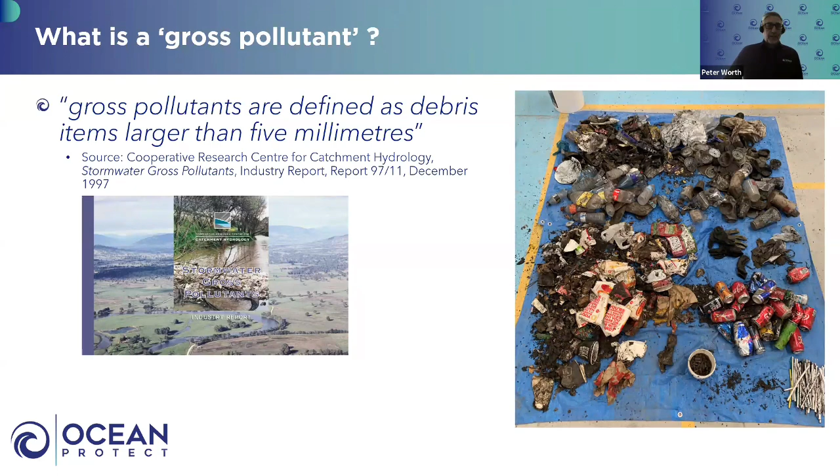All right, thanks, Pete. Now, the 97 CRC report, which is pictured there, first introduced the first proprietary GPT. It was actually invented by 2 retired Australian engineers down in Victoria in 1992. It was also the first GPT that was really tested by a university at all. It contained a separation chamber, shown there.

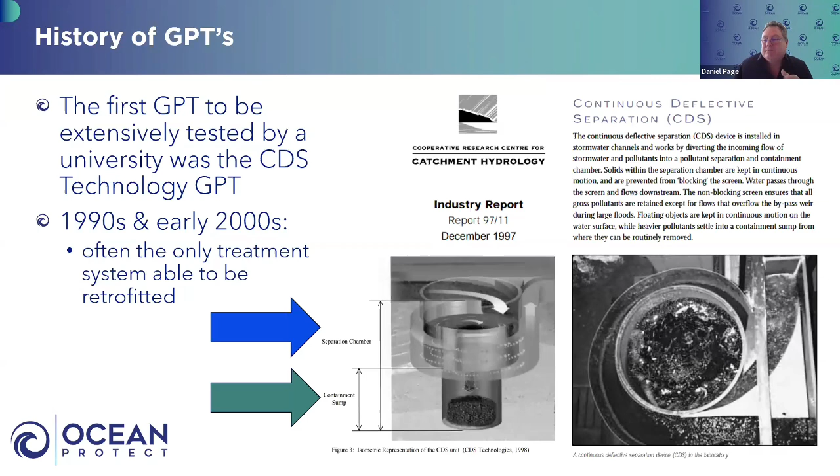It also contained a separate sump, shown there, and it incorporated an indirect screening technology that was commercially available from about 1994. They were easily retrofitted into existing drainage networks. Many of the coastal councils around Australia installed a lot of these throughout the 1990s and the early 2000s. It was part of the Stormwater Trust grant process around then, and also led to the preliminary development of council-based stormwater management plans and reports that we can sometimes see today.

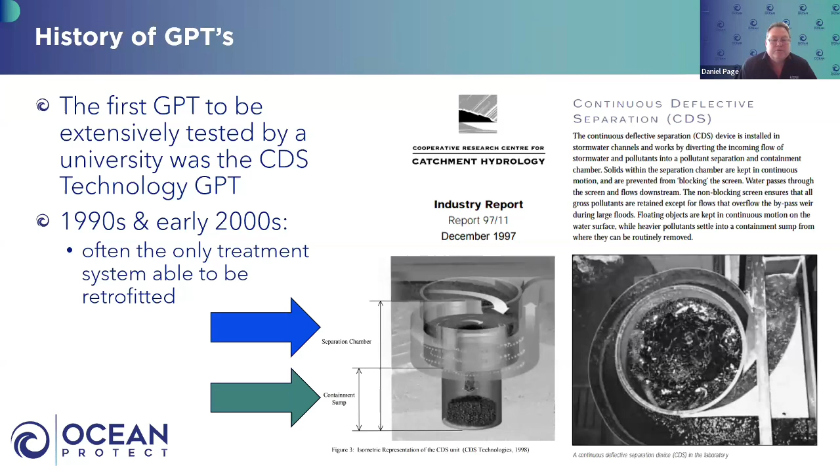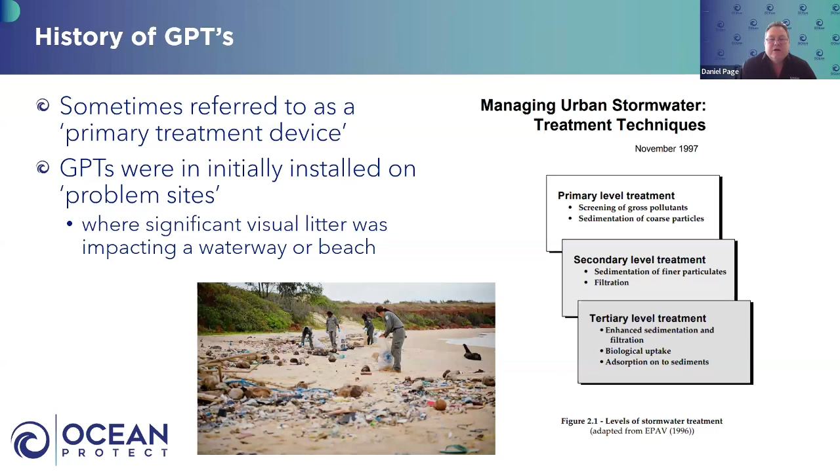They are also sometimes referred to as a primary treatment device. This came about because of the 3 different categories, primary, secondary, and tertiary, that was introduced and used by New South Wales EPA, Victorian EPA in 1997, 1996, and so on. Today, a lot of products actually span across multiple categories, so therefore they're not that useful, but GPTs can still be referred to as a primary treatment device.

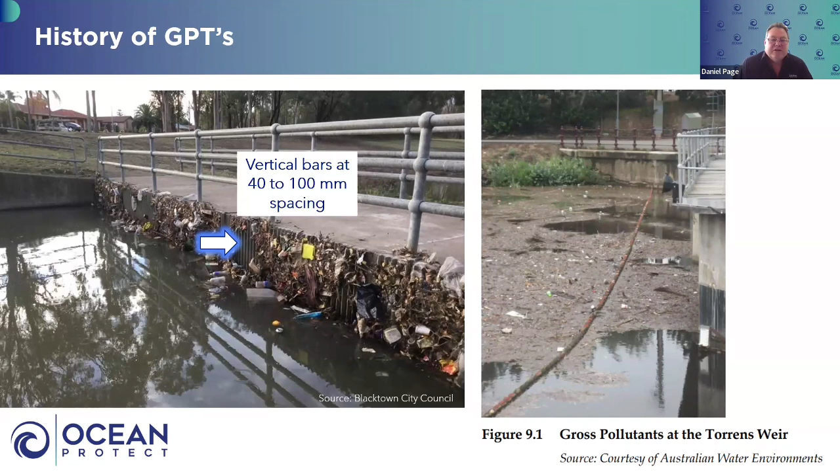Later on, we're looking at the 2010 definitions. You had that most GPTs were defined as being really good at capturing gross pollutants. In fact, there's hundreds of reports, industry reports, and product reviews that are available on different products, all confirm the effectiveness of GPTs to capture gross pollutants to some degree. As seen in the pictures here, you can get a lot of different gross pollutants that meet the 5 millimeters in 2 dimensions categorization. Some of these reports also highlighted that GPTs can remove associated pollutants.

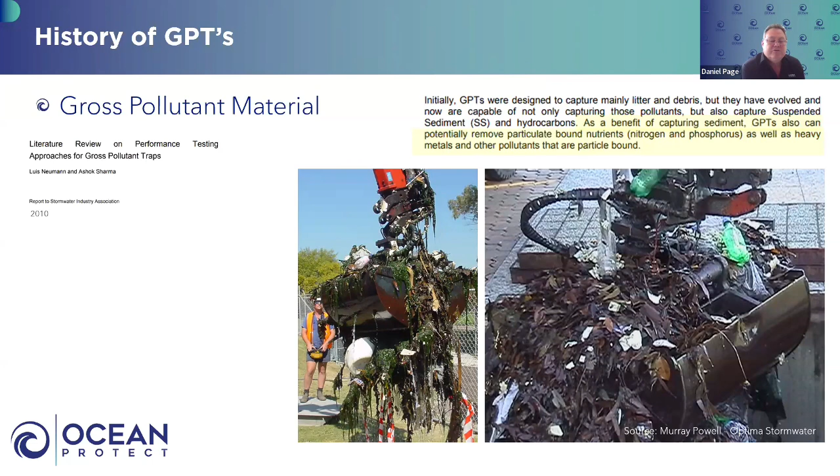Now, associated pollutants are essentially pollutants that you remove when you actually capture another pollutant. So the GPT report in particular mentions that, and there's a caption just there. And in particular, if I focus on the highlighted section there, you can see that they also make reference to particulate bound associated pollutants. But like many of the other reports that are available on the market, they don't quantify necessarily how much of each pollutant the GPT can actually remove. And therefore, to better understand the overall performance of a GPT, you need to really know the different types of GPTs that are available on the market. And I'll hand back to Pete for that.

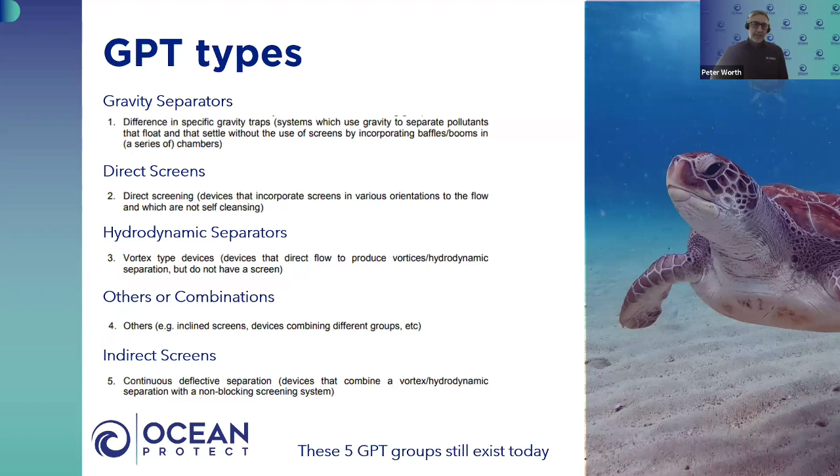All right, we'll go through the 5 main types of GPTs that we see or have seen historically. Gravity separators, direct screens, hydrodynamic separators, others or combination style units that use 1 or 2 of the other categories, and indirect screening GPTs. Thanks, Dan. It's a picture of the 5 main types and some images of some different GPTs that fit into those categories.

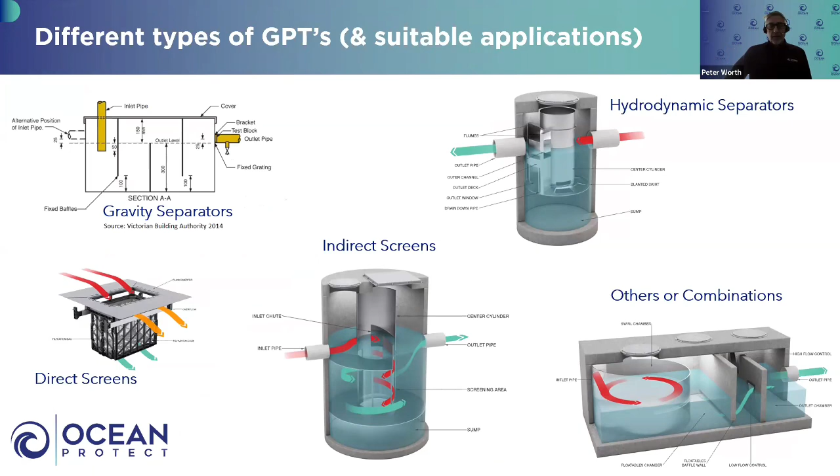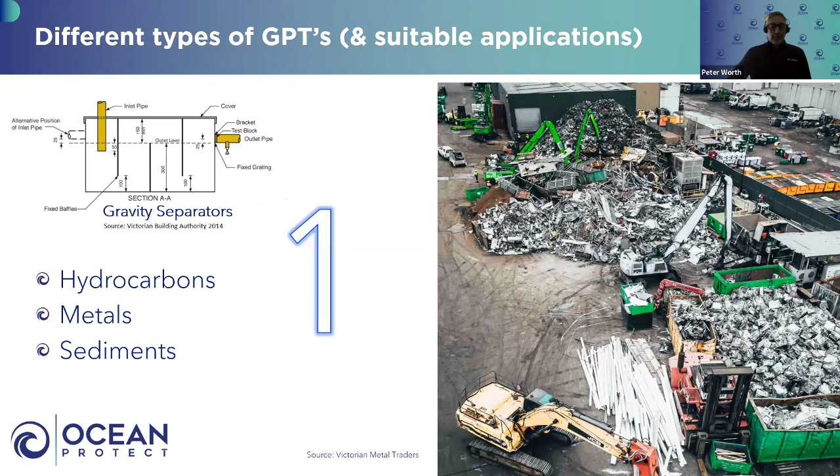Type 1 are your gravity separators, typically using baffles. Internal baffles that elongate the flow path through the system and promote gravity, dropping the sediment and pollutants to the base of the system. They typically target hydrocarbons, metals, and sediments, and it's really important to consider what your target pollutants are for your particular project or site when you're picking which type of GPT you may want to use.

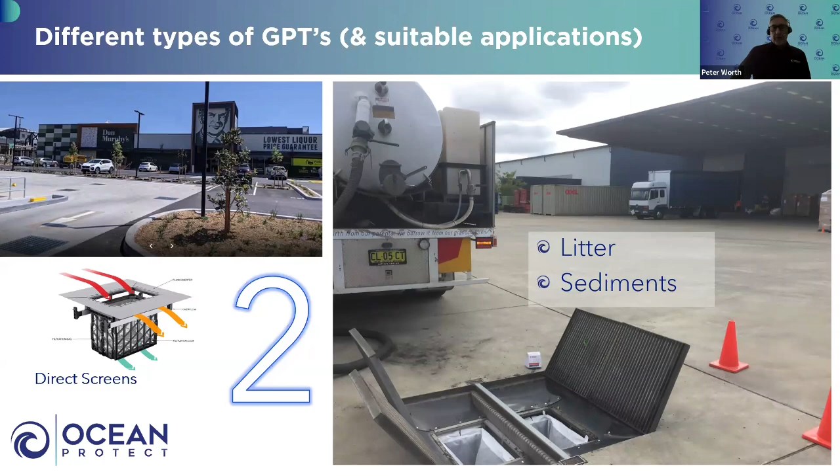Second type is a direct screening style GPT, such as the vertical trash racks that Dan touched on earlier. And we also have the pit insert style GPTs, in our case, our Ocean Guard. As pictured here, they capture debris coming in through a grate via surface runoff. Next type is your hydrodynamic separators, basically creating a vortex inside the system to promote sediment to drop to the base into the sump. And they're often used for car parks and industrial sites where litter may not be a key pollutant, because they really target more of your hydrocarbons and your sediments.

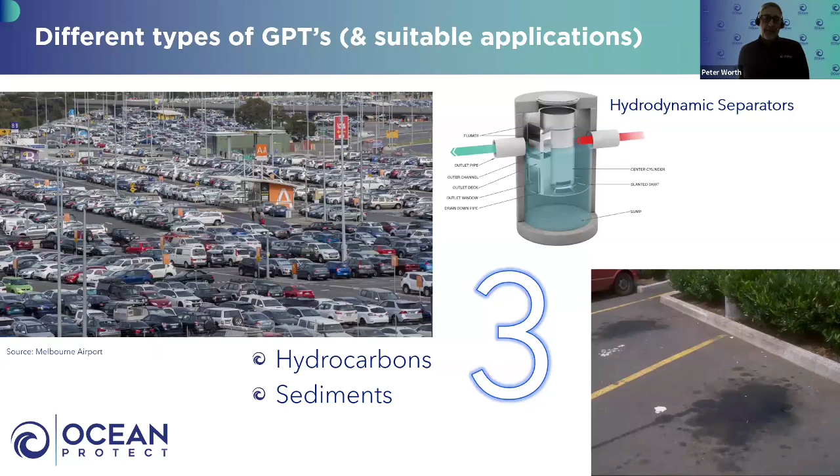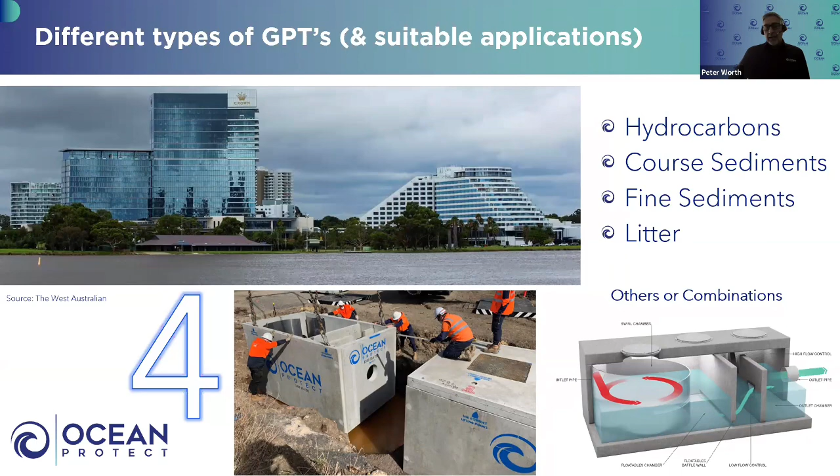Next type is the combination style units. Basically, they can target hydrocarbons, coarse sediments, fine sediments, and some litter. Combination units use a combination, hence the name, of some of the other types of GPTs that we've just spoken about. Often hydrodynamic and baffles are used in conjunction, as you can see the image on the bottom right of the screen at the moment. Or you can also have indirect screening and hydrodynamic functions in the one GPT. The image at the bottom right is a Vortechs unit. Sorry, just go back down, thanks. Which combines hydrodynamic separation and baffle walls. And it can be quite handy when you have sites with shallow depth to inverts.

Last type is indirect screening GPTs. They've been around for a while now. They're probably the most popular GPTs, and in my opinion, deliver the better outcome. They target a wide range of pollutants, including litter, debris, sediments, and hydrocarbons. They use a continuous deflective screen, which is non-blinding, therefore more robust in delivering a better outcome.

The OceanSave unit, which is the graphic there in the middle of the screen, is a continuous deflective screening GPT, which is also non-blinding. Yeah, and there's lots of these GPTs historically been installed around the world. They're very widely used.

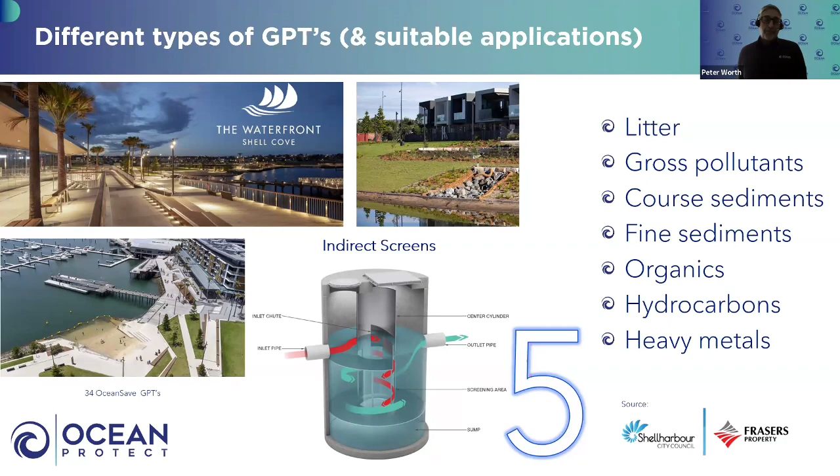Thank you, Pete. Thanks, mate.

All right, now over to key design and management considerations that you may want to go through. So according to the Stormwater Industry paper of 2010, which I referenced earlier, there's 5 general categorizations or thoughts that need to be considered when designing or selecting a GPT. It's not just these 5, but these are the 5 that this paper grouped together, and it's a reasonable paper to go through and teach you guys today on what processes you should consider.

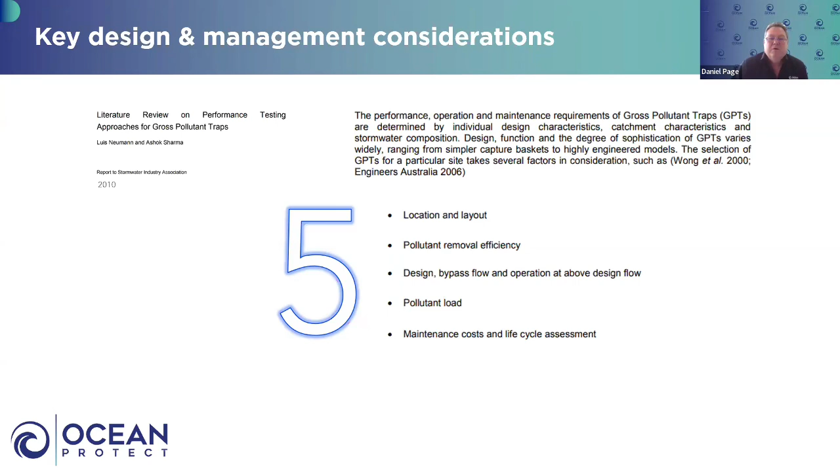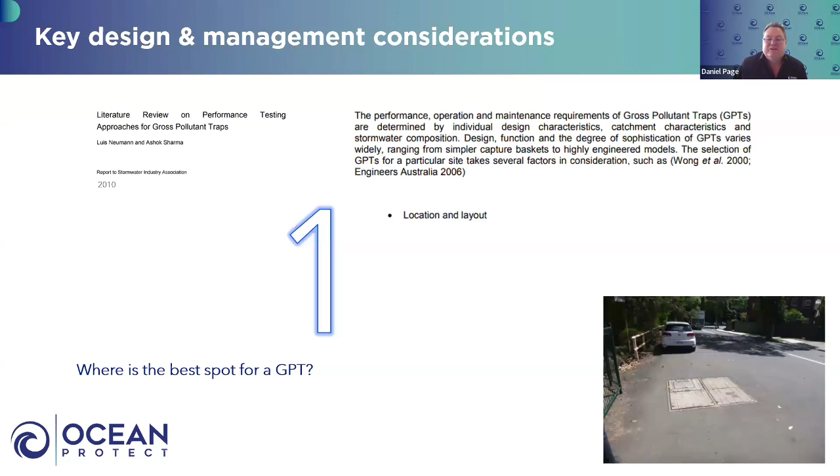But let's look at the first one. Just like buying a house, rule number 1 is always location, location, and location. So the best thing there is to work out where is the best spot for my GPT. So whether you're looking at a drawing or a council site or whatever, you need to look at that. You may want to consider putting them in the road, although you need to consider maintenance, access, and so on. Beside the road or the road verge might be a better option,

or perhaps in a footpath, an access way, a reserve, or a park that you can see in the background of one of those photos. Even a garden bed sometimes might get used. So long as you have the space for the construction to occur, and access to the manhole covers for future maintenance, this should be all right. You should also, though, consider any other services that might be around, electrical, gas, and so forth.

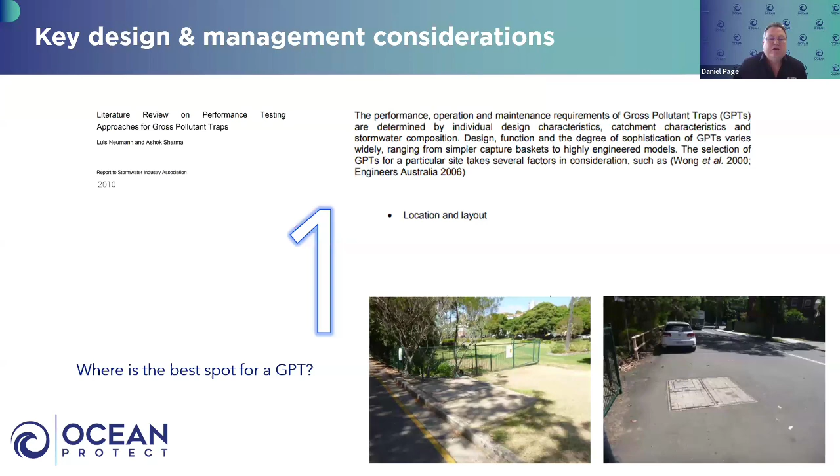And sometimes you may need to consider using multiple devices if one single device in one location at the end doesn't necessarily work. Okay, that's the first one, location. So as I said, it's the most critical one. It's the one you've got to start with.

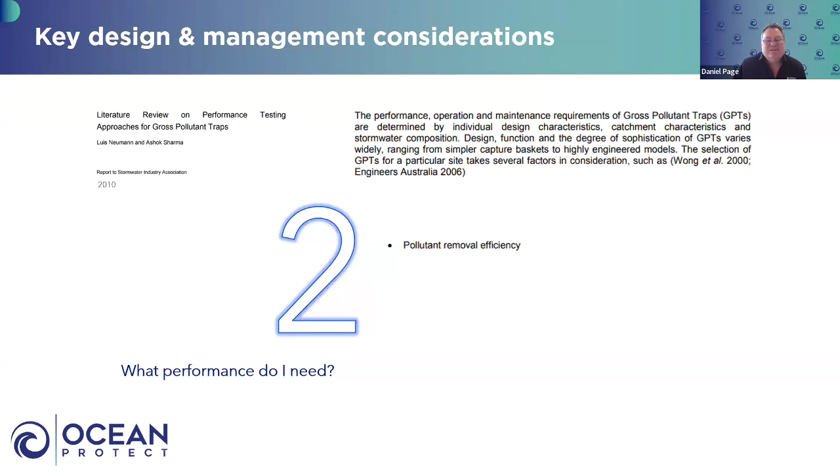Then you get into the second type, which is your removal efficiency. Now, you need to consider, well, what is it that I need to capture? How much of it do I need to capture? What targets do you need to capture? Below is an example of the Blacktown City Council targets taken from their Growth Centres Development Control Plan. The target for gross pollutants is listed as 90%, and they also stipulate a 6-month treatable flow rate for all GPTs.

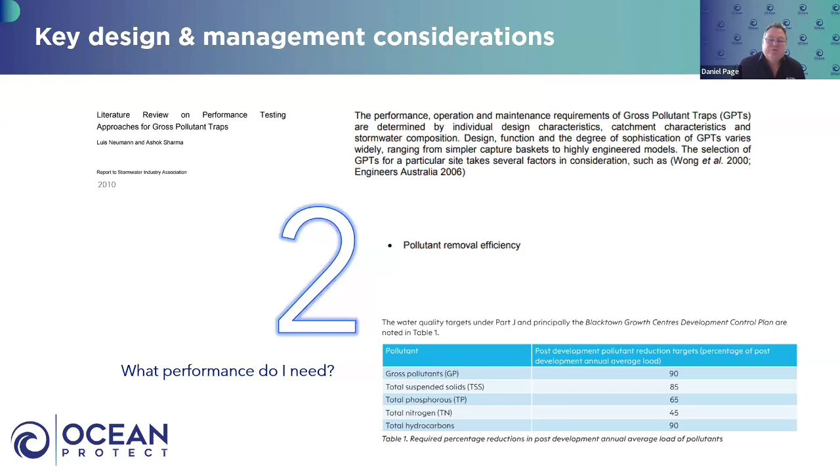Now, technically, Peter mentioned the indirect OceanSave GPT before. This GPT can easily achieve the 90% target just by treating a 2-month flow event. So it doesn't actually need to treat the 6-month flow event. And in actual fact, you could end up with an oversized GPT by having such a large treatable flow rate. But the upside of this, of course, is that you treat and capture more TSS and potentially more TP when you do so. So that's okay.

Step 3 or consideration 3 is also a very critical one. It's one that does require a little bit more engineering rather than just picking something out of a list. It includes the peak flow rate. It includes the treatable flow rate. And it also considers some of the other impacts, such as potential flood risk or downstream water and so forth.

Now, the peak flow is a hydraulic limitation of the GPT. It is defined by the type of GPT, the model size of the GPT, and in some circumstances, the configuration of that GPT. I would recommend that you talk to the suppliers or look at their technical information and review these in order to get some information to help make your selection.

Oversizing a GPT model to achieve a higher peak flow rate is not always the best solution. I would actually suggest that if your peak flow is substantially higher than what the manufacturer's model would normally recommend, then you may need to go with a smaller GPT and position it offline and have an appropriately sized and designed diversion chamber instead.

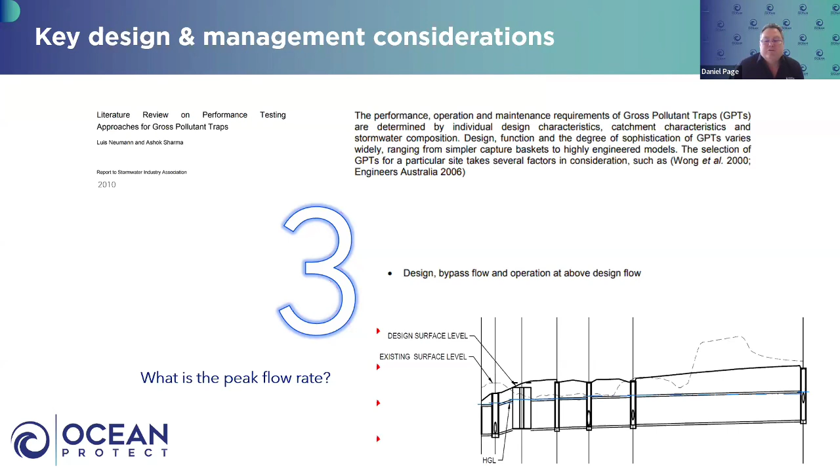The supplier should be able to help you out with this, or at least point you in the right direction. All right, the treatable flow rate is the next iteration on this part 3, and it's defined really by the type of GPT that you select. Each GPT may have a different treatable flow rate or requirement for treatable flow rate, and in part, some of the other 4 design considerations may need to be considered when you're looking at treatable flow rates.

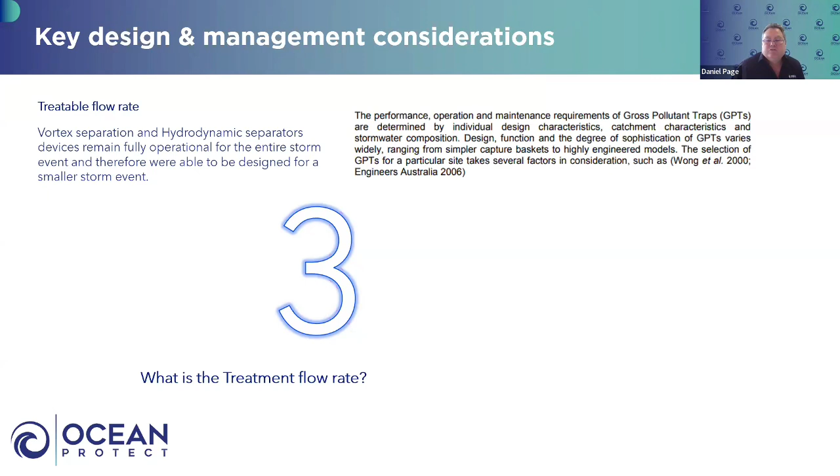For example, different GPT types may need to treat different flow rates just to achieve the same result as far as performance goes. Now, if I look just at the OceanSave and the CDS technology GPTs, the pic on the left shows the indirect screening flow, or the CDS technology, which Peter talked about earlier. Now, this type of GPT can be designed to treat a much lower flow in the treatable flow rate and still achieve a high performance because of its non-blocking nature.

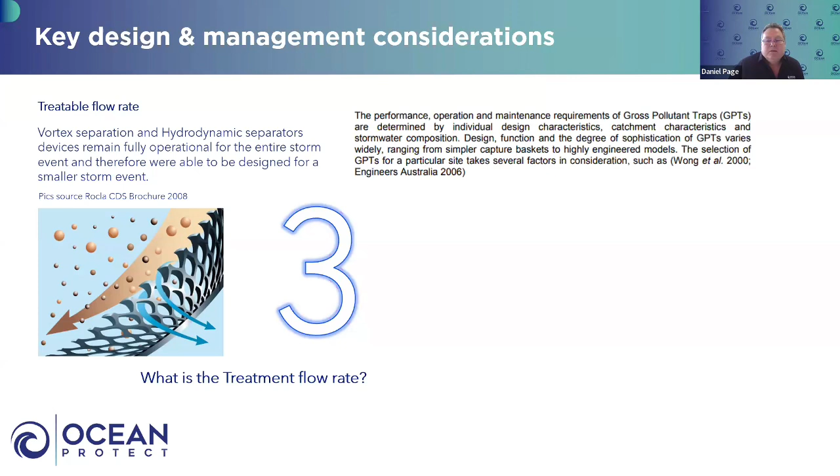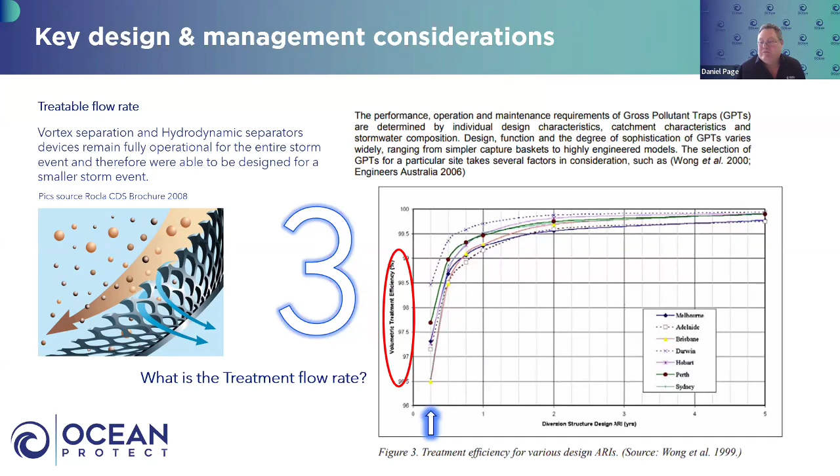Now, these graphs took the university a few months to produce, and they only did them for the 7 cities that are listed there. Today, of course, you can use MUSIC, and you can crunch a whole 10 years of data in a few minutes and work out exactly how much flow volume you actually have going through your GPT. And if anyone needs any help in doing that, then do let us know.

The last part of section 3, and this is quite detailed, sorry for the time taken, is the operation of the GPT. So it's very important, of course, to put a GPT in that actually does what it's supposed to do. It's very pointless specifying and installing a GPT that just does not function. That just doesn't make sense to you, I, or the environment. The biggest one, of course, is downstream hydraulic impacts, and these really should be considered.

The section example below there is the correct configuration of an OceanSave GPT upstream of a bio, for example, although the downstream water may just be a lake, anything else, even a detention basin. Now, if the bio has drowned inlets, which this one has, which means that the water comes up below and over onto the surface, or has an EDD that is higher than the invert level of the GPT, then this is not good. Or if the flow that comes down the GPT can't exit the bio, then obviously that leads to a backing up of water and reduction in the performance of the GPT during a rain event.

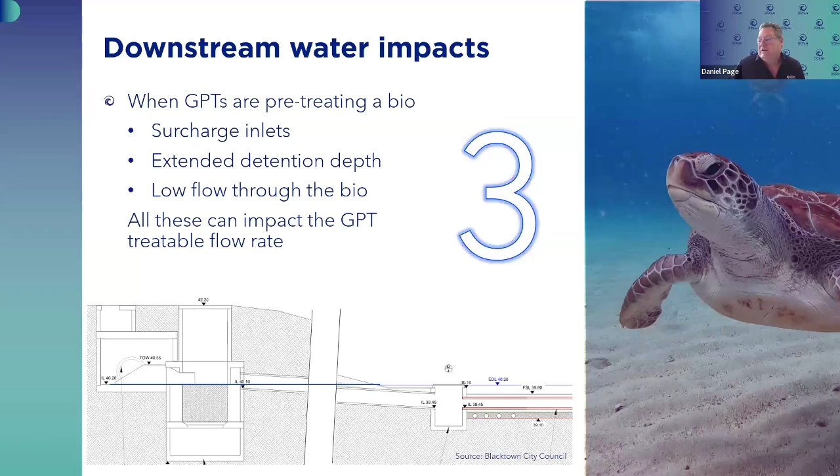So, for example, this GPT here would do about 500 litres a second, and the example I took it from, the bio, does about 22 litres a second. Therefore, you really need to make sure that you do have enough flow that can travel through the bio. Otherwise, your GPT is only working for a few minutes. It's probably the biggest hydraulic error that we see many consultants and also council engineers inadvertently detail on their plans. So I do implore you to seriously consider the actual site impacts and the backwater impacts.

It's not always the case just with bioretention systems or detention basins downstream. It can also be the case where you might have creeks, rivers, oceans, different things like that. So you need to be aware of the invert levels of your GPT and any top water levels or standing water considerations at your outlet. Right. Design considerations number 4 and 5 that were listed in the SIA report are similar, and you're looking at pollution load and maintenance of that.

They're more relevant to the council engineers that are in the audience, or to the other final GPT asset owners, if there's any of those in the audience. The size of the GPT pollution volume in the sump or the offline storage area needs to be large enough for 6 months and/or up to a year of pollution load. You don't want to have it much more than a year. You don't really want it much less than 6 months. Otherwise, you're cleaning it too often.

And most GPT manufacturers have storage volumes that fall into this area and are adequate for the model size that you've actually chosen. So if you size the GPT right, you generally size the pollution loading holding area correctly. Now, MUSIC can also be used to estimate the pollution load. All you do there is model up your catchment, look at the pollution loads in your results and so on. But also note that the MUSIC pollution loading is conservatively high. When you look at TSS, it's actually quite high. When you look at gross pollutants, it's actually quite high. So you can use that as a worst case scenario.

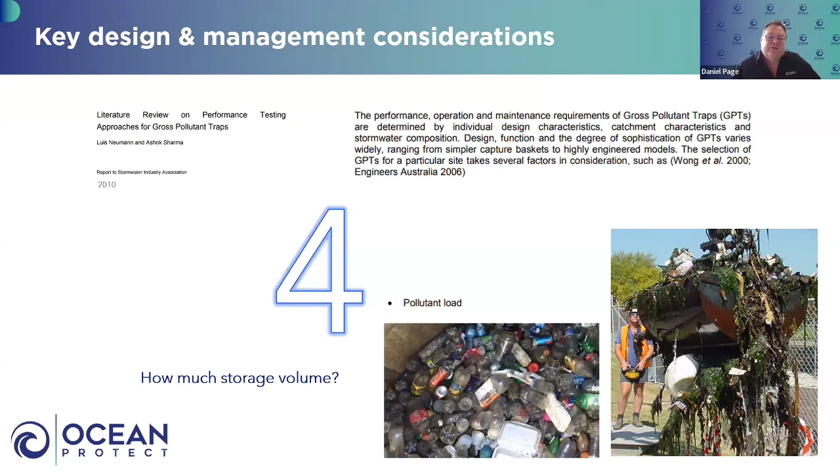Likewise for section 5, which is your design consideration of maintenance, and that subsequently forms into your life cycle costings. So this is again more important to your final asset owner, your Dineshes and Joshuas in the audience. The critical thing that the engineers should be considering, though, is just to ensure that all GPTs can be maintained. And if you want to see some examples of ones that have never been considered that way, I can show you some photos of ones that you can't actually get access to, which is a bit pointless.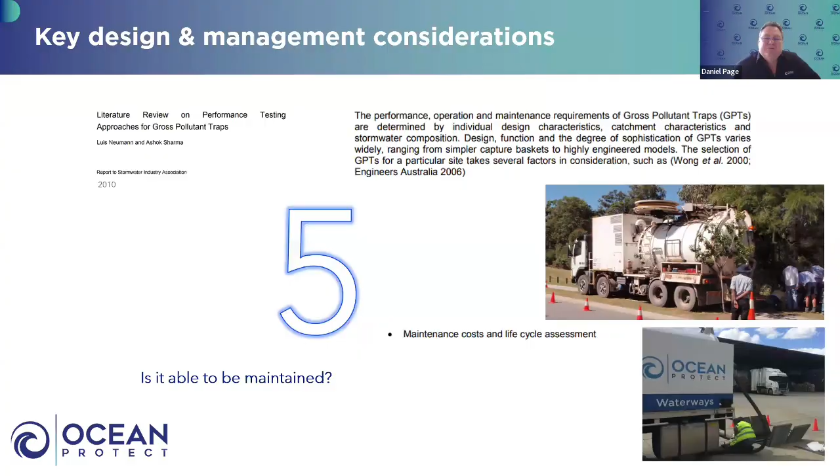It's also worth noting that GPT maintenance costs are generally similar for all the different types of GPTs, based on the volume that you're taking out and the access and so on. So the maintenance costs may not necessarily be relevant to you as the engineer, unless you're really comparing, say, the treatment using multiple small baskets directly with a single GPT at a downstream location instead. So, anyway, that pretty much concludes our presentation, unless Pete's got something more to comment on.